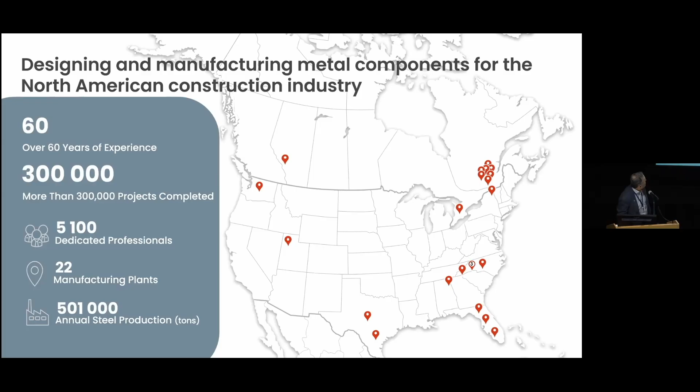We have multiple products as part of our production portfolio, a lot of prefab products for the construction industry, mainly the steel aspect. As you probably saw on the tagline, our slogan is 'better building solutions.' So we're not restricted only to steel projects - that's why we have mass timber and concrete composite floor systems as part of our portfolio of products.

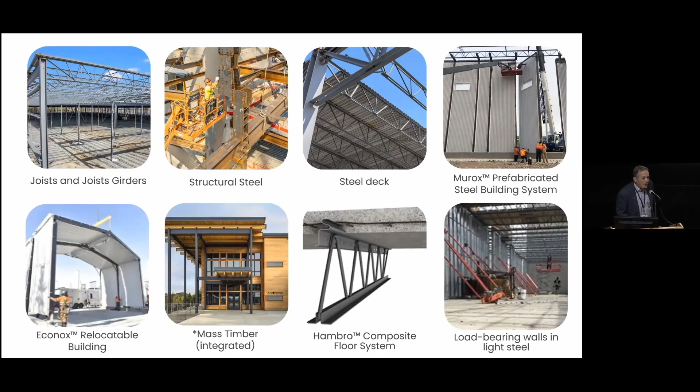Structural steel is our core business, along with the building aspect. Part of structural steel includes steel joist and metal deck - this is one of our core products that we have with distributors in the market. A lot of steel fabricators purchase steel joist and metal deck from us, so we're a supplier to them. We're in a structural steel niche and we try not to compete with these steel fabricators. So 4,000 tons and more, we're the ones looking at that project; below that, we leave it to our distributors.

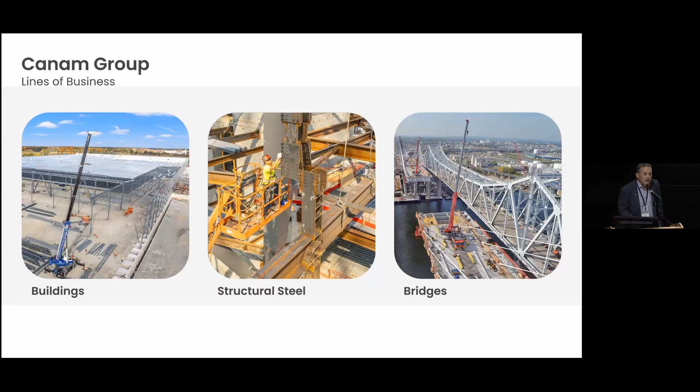And we are in the bridge business with Aecon. We delivered the Gordie Howe project and the Champlain Bridge here in Montreal, so quite active as well on that aspect. This is the different business sectors that we operate in, and the core mission is the pursuit of a better customer experience. There's no end to delivering this experience, and listening to customer needs and wants is the driving factor of our innovation as a group.

Health and safety - I mentioned this is one of our top priorities. It's now becoming a behavior and a culture within our organization, by reminding and conditioning our people at work, but also at home, to look after themselves because we want them to be safe. That's our top asset in our organization - the people.

So I wanted to briefly indicate to you our lean journey. Lean means that we want to eliminate waste and inefficiencies, because in the pursuit of a better customer experience, the customer doesn't want to pay for waste or inefficiencies - they want to pay for direct value of what they're going to get.

Back in 2004, we started with more Kaizen and 5S type tools, because as you know, we own 22 manufacturing facilities. Manufacturing is at the base of our business. We are on job sites, but the base is really looking after a better way of operating in our facilities. So as we went through manufacturing, lean manufacturing is where we really started our journey. After that, we went into lean construction, and today we're moving into more innovation and sustainability, bringing all of this together and listening to the job site's needs and wants in order to save time, because money is in the labor much more than in the product or material.

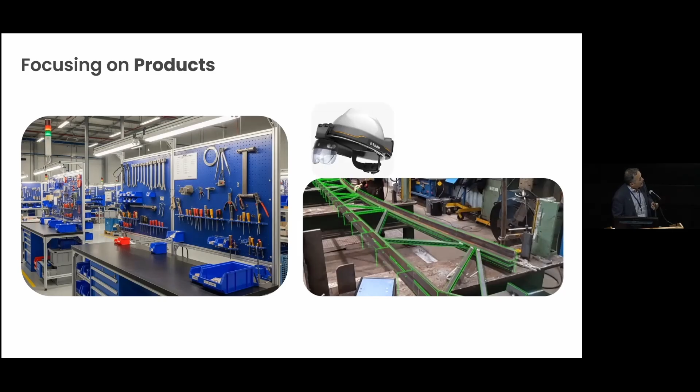So part of our innovation in the shop, of course, saving time, is to place an ordering thing with the 5S board for the workers. Also helping our inspector with HoloLens in order to have a faster way to identify if there are some missing pieces or if it is correctly the right geometry.

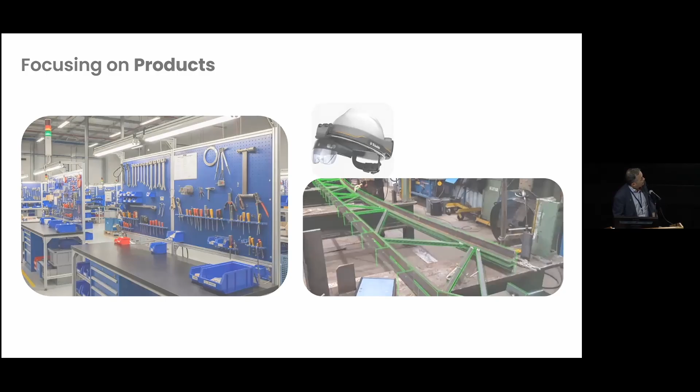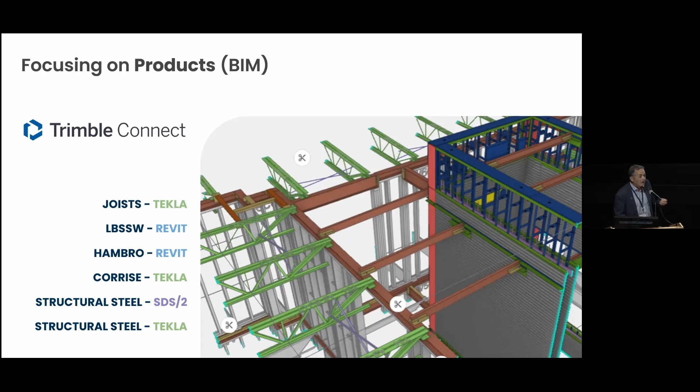We also are on Trimble Connect with all our products, and we have access to different types of detailing software because we prepare the shop drawings for our manufacturing facilities. That's to keep in mind. So we're complementary to the structural engineering Revit file, getting into more the detail of the engineering. So we look after connection design and our shop drawings.

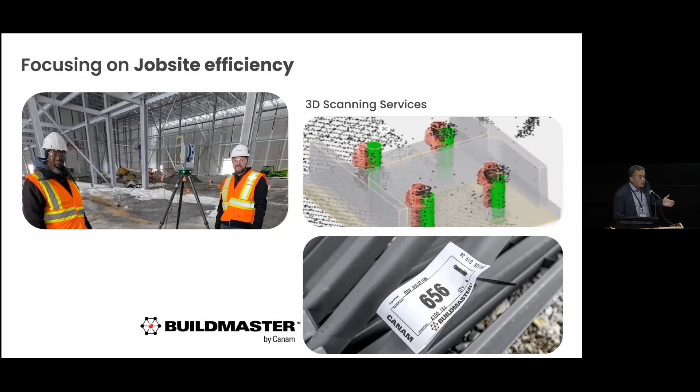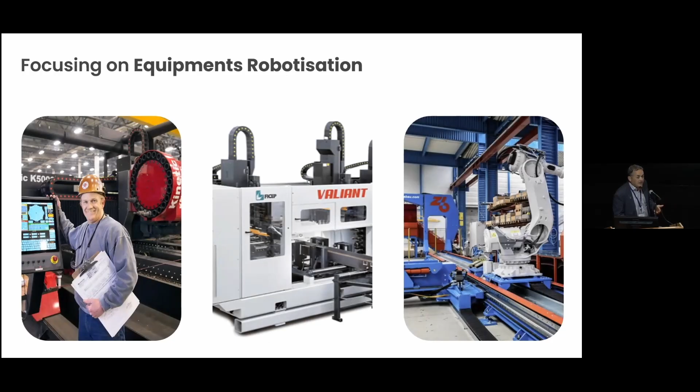Also, we have a lot of robotics in our facilities that we invested in. We have a CapEx of about 80 million a year in our operation that we reinvest into increasing our operation efficiency with different vendors. So what we call the C3 is the Canam Control Center.

So on the daily, weekly, monthly, and quarterly basis, what we learn is the faster you address issues and encourage issues to be reported, you improve yourself. So we are in a culture where we don't encourage mistakes, but we give forgiveness for mistakes. That way people are not afraid to report when there are issues to be resolved. And we, as a team, address those. That's a very efficient way of addressing those issues on a weekly and even daily basis with all the team.

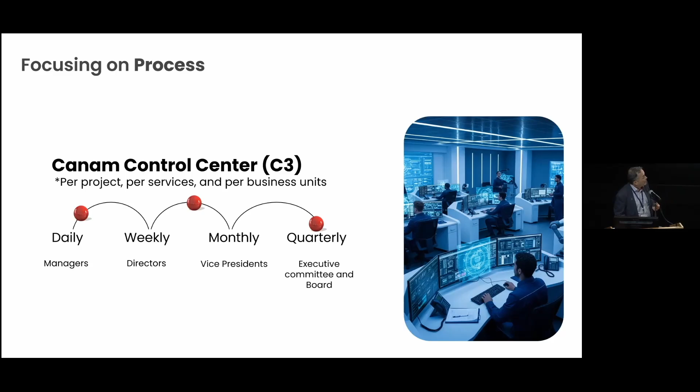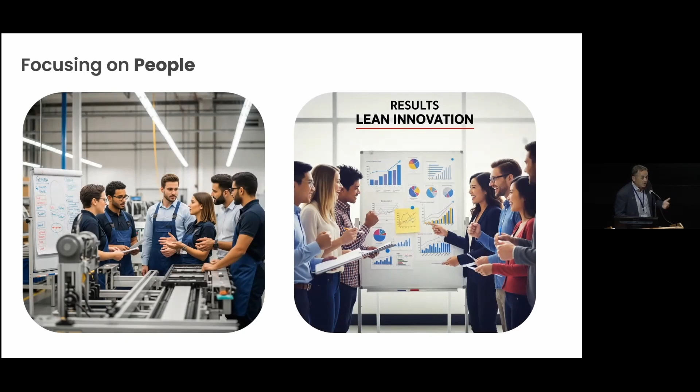Beside the product, the process, the people, as I mentioned, is the key. And we involve a lot. Our journey in Lean has accelerated in recent years by involving people and having their buy-in into our change. And what we say at Canam is what is constant is change, so we need to be adapting ourselves.

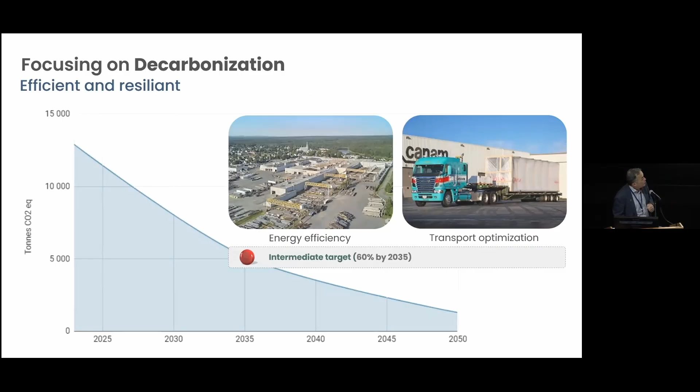So part of our journey of decarbonization, we want to reduce and be carbon neutral by 2050 in our operation, mainly with the energy efficiency of consumption. Obviously, having a lot of our facilities in Quebec helps with the hydroelectricity. We have some in Calgary where we're addressing the gas consumption over there. Our fleet of transportation is also the other aspect. So we have an intermediate target of reducing by 60% by 2035. We recently also have improved a lot on our consumption on our core product, the steel joist,

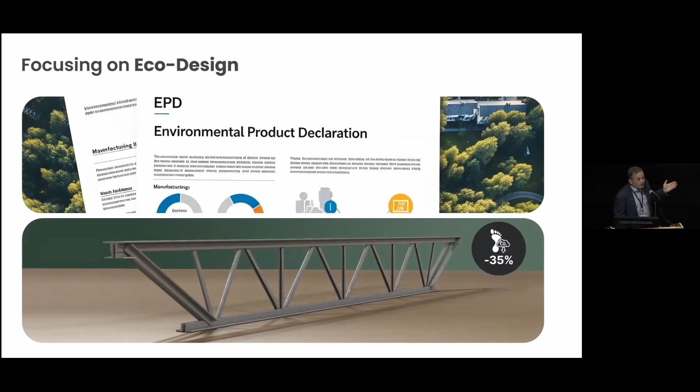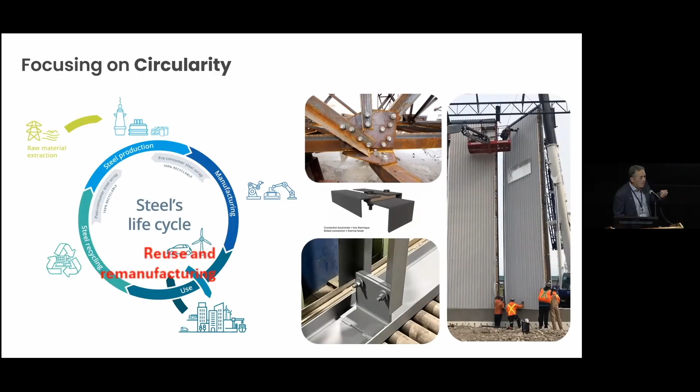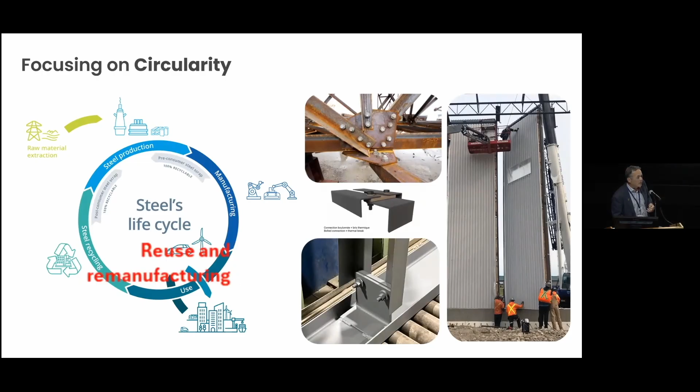having our environmental product declaration for all the products that we manufacture. And last, one thing we're exploring and really looking at is the reuse of steel. So we assemble our product so that it could be disassembled in the future in order to reuse the material, not go back to the mills and just recycle, but reuse it really as a used part. We have a few projects underway. So if there are people interested in this, we're highly moving forward towards that aspect.